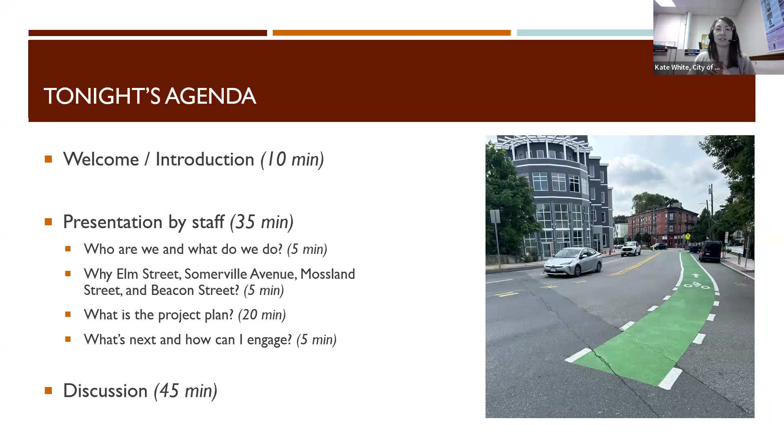This project is being led by the Mobility Division, which is part of the city's Office of Strategic Planning and Community Development, known as OSPCD. My name is Lillian Worth, I'm a transportation planner, and I'm working with Adam Polinski, senior planner, and Kate White, transportation planner for outreach and engagement.

Although mobility is at the helm of this project, we always work closely with other city departments, including parking, engineering, and the fire department when we're proposing changes to a streetscape. For this particular project, because it's on the city line, we're also coordinating with our counterparts at the City of Cambridge.

So I want to briefly share a bit of background on the values that shape our work. For all projects, we start first and foremost with the goal of keeping people safe on our streets. We also aim to increase access to public transit and to create more sustainable options for people to get around the city. We have 2 ordinances that really underscore those commitments.

The Complete Streets Ordinance from 2014 is somewhat broad, and it stipulates that when we're redesigning streets, we should be designing them for all modes of travel and also all ages and abilities. The Safe Streets Ordinance, passed earlier this year, sets more specific targets and timelines for street safety projects, including implementing protected bike lanes from the Bike Network Plan, improving accessible parking spaces, and making pedestrian and transit improvements.

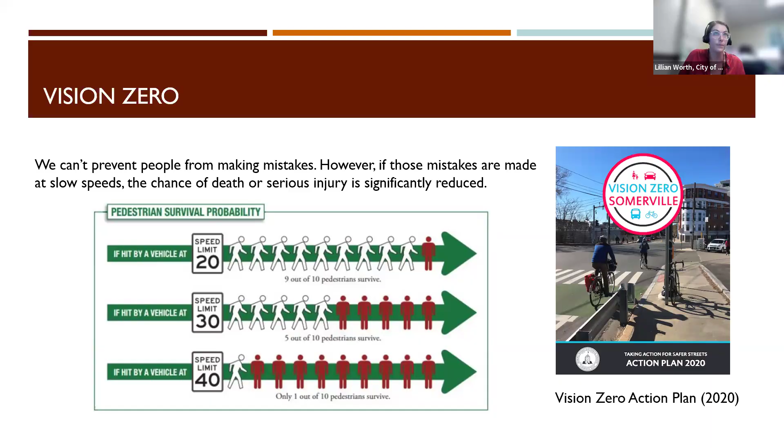Next, I'll go into some of the factors that went into our decision about why we're making safety improvements here specifically. All of the streets in our project area are part of the Bike Network Plan, with Elm-Beacon and Somerville Ave planned to receive protected bike lanes and Mossland Street set to become a low-traffic neighborway. We'll get a little more into the details of what a neighborway means later in the presentation.

The Safe Streets Ordinance passed by the City Council obligates us to create approximately 30 miles of new protected bike lanes by 2030, which is about 4.5 miles per year counting from today. This project, when complete, will provide almost 2 miles of those new protected bike lanes. So it's a very high impact project in a really key area of our network.

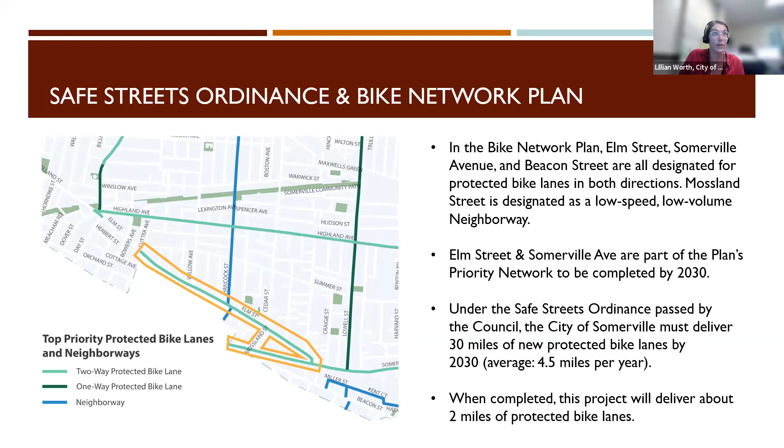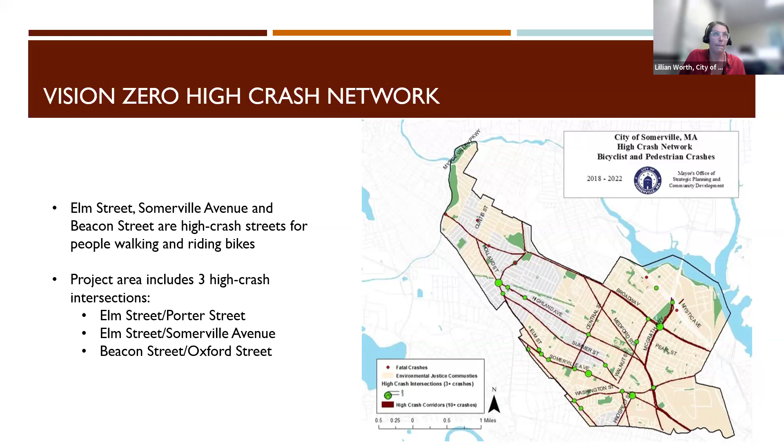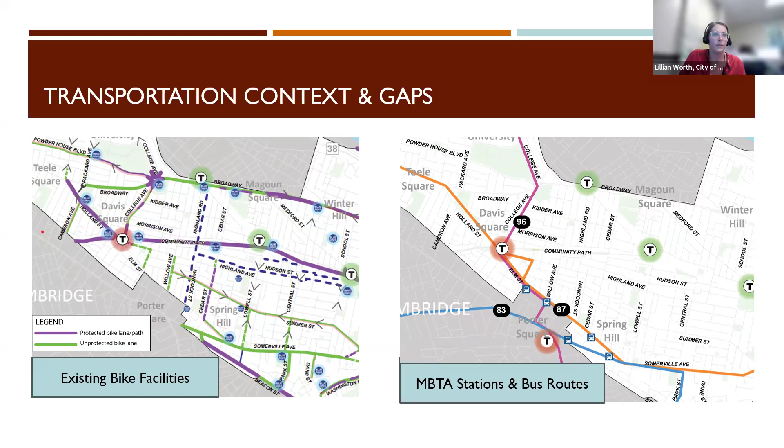We want to also acknowledge that this is the gateway to the Beacon Street protected bike lane, which is a very high use corridor and one of the best quality bike facilities in the city. Currently it dumps you out on the northern end in a very wide, unprotected intersection, so we want to fix that.

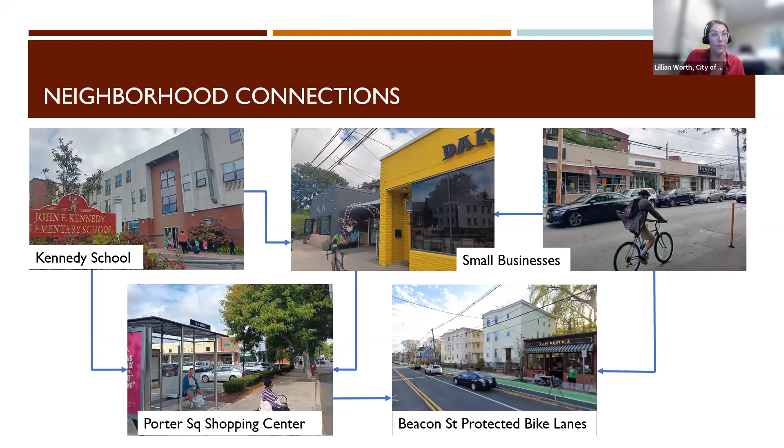We want to acknowledge that all of the different elements in this neighborhood are important, and that as we develop design plans, we're considering everybody in the area who lives here, who works here, who visits, and who travels through here. With that context in mind, I'll turn it over to my colleague Adam, who will describe the project plan.

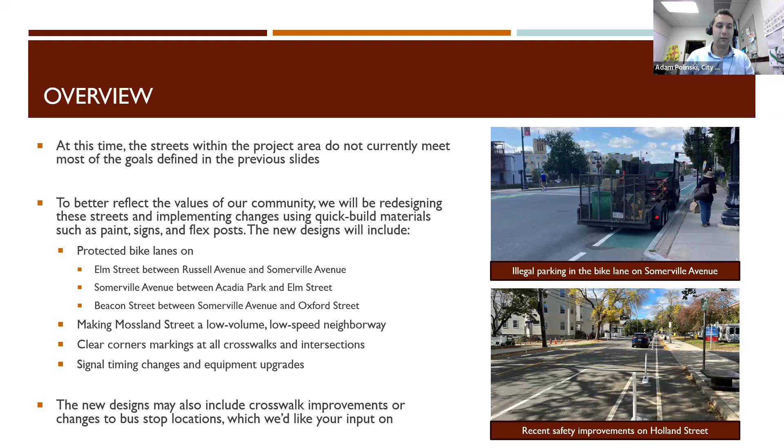We're also looking to make improvements to crosswalks and potentially changing bus stop locations. That's something we really want feedback from you all on, to help shape where we focus those efforts, specifically for some of the pedestrian and bus treatments.

Since this is a quick build project, we wanted to make sure it was clear regarding what is and isn't within the scope of the project, since it's a little bit more limited than other types of projects the city does. As far as what is included, we will definitely be installing protected bike lanes.

We will be changing parking regulations, narrowing travel lanes, modifying traffic signals, and changing the street network. That's specifically in reference to Mossland Street.

As mentioned on the last slide, we're also looking at opportunities to improve crosswalks or make changes to bus stops. We may be able to coordinate with our urban forestry team to plant some additional trees on these streets, and that's another thing we want to hear from folks on, in terms of whether there are big gaps in the current urban canopy.

What won't be included as part of this project is any street repaving or sidewalk reconstruction. There's not really going to be any physical changes to the street, so we won't be able to add any physical traffic calming treatments like speed humps or raised crosswalks.

That will also preclude us from adding any new crosswalks at this time, because you do have to build at a minimum curb ramps to add a new crosswalk. There won't be any utility work of any kind either, whether below or above ground, and we also won't be adding any planters as part of this project.

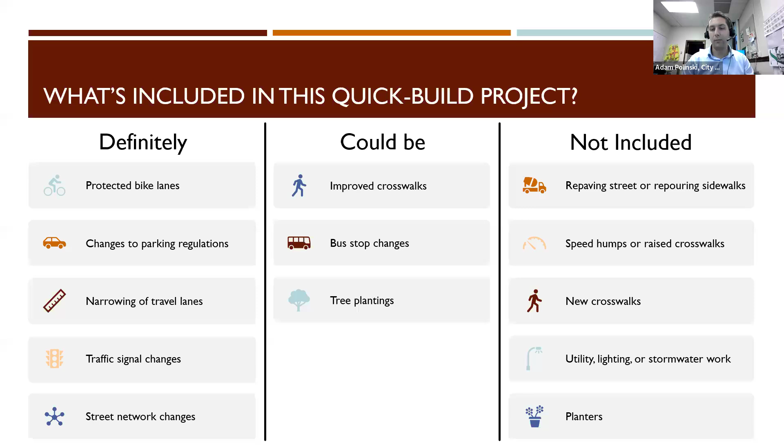That obviously begs the question: if the scope is so limited, why are we doing a quick build project and not full reconstruction? Well, the main answer is that at this time, none of the streets within the project area are in the capital investment plan or the 5-year repaving plan.

So we are still obligated to deliver 30 miles of protected bike lane over the next 5 years, even if not all of those can be full reconstruction projects. For this particular project, that leaves a quick build lines and signs method as the only way to deliver street improvements here for the foreseeable future.

That may sound like there are a lot of things that aren't possible, but there are some benefits to a quick build as well. This type of project allows us to implement things on a much faster timeline. The construction is a lot less impactful because most of it happens overnight, and it allows us to be more flexible, whether that's during implementation or afterwards. If there are things that need to be tweaked, it's a lot easier to do it with paint, signs, and cones than it is with curbs and concrete.

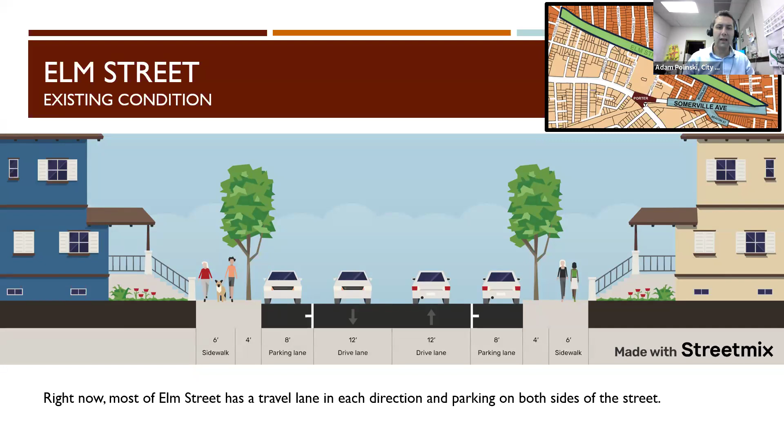So with that, I'd like to start going into some of the design options we're currently considering. Let's start by looking at Elm Street, which is the longest section of street in the project. While the width of Elm does vary quite a bit between Russell and Somerville Ave, as you all may well know, most of it looks roughly like what we're showing here, which has one travel lane in each direction — one southbound, one northbound, or eastbound and westbound, depending on how you want to look at it.

There's also a lane of parking on each side. Our design for Elm Street will include a travel lane in each direction, so we're not planning on one-waying Elm Street. It will also, at a minimum, include protected bike lanes in each direction per the bike network plan. For the majority of the street, with the caveat that the width does change a little bit, that will leave typically about 7 feet of space. At this time, we anticipate using that 7 feet to provide a lane of on-street parking, and we welcome the community's input on which side of the street parking will remain, whether on individual blocks or slightly longer stretches. That's definitely something we want to work with everyone to understand — where it would be most beneficial to keep that parking, on which side of the street.

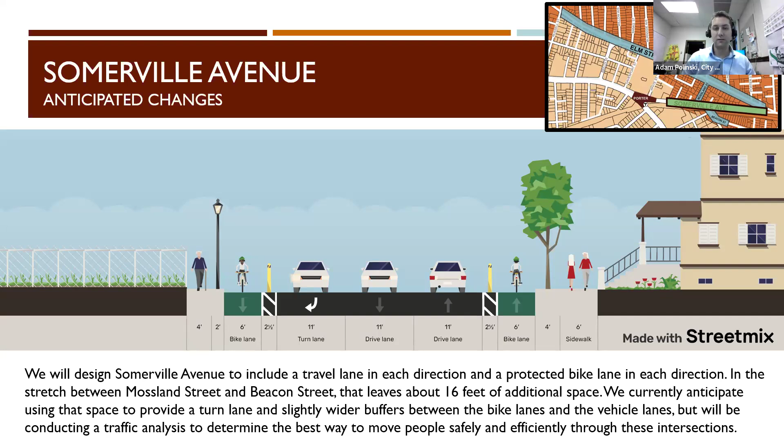Next, we'll move over to Beacon Street. There isn't a big chunk of Beacon, but it is a critical piece. As Lillian had mentioned earlier in the presentation, there is a gap here where the current protected facilities further down don't lead up to the ones on Somerville Ave.

We will be designing Beacon Street to include, at a minimum, a travel lane in each direction and a protected bike lane in each direction.

In this stretch between Roseland and Oxford that leaves about 10 feet of space, and we currently anticipate using that space to provide a lane of parking on the west side of the street and slightly wider buffers between the bike lanes and the vehicle lanes.

However, we are also considering an option that includes a right turn lane instead of a parking lane. Depending on which way we go, we'll be coming back to you all at the concept design phase to talk through some of the trade-offs of that particular option, depending on where we land and why we got there.

Building these new protected bike lanes on a short stretch of Beacon Street will connect the new facilities that we're building on Somerville Ave and Elm Street to those dedicated bike lanes on the rest of Beacon, so it is filling that critical gap.

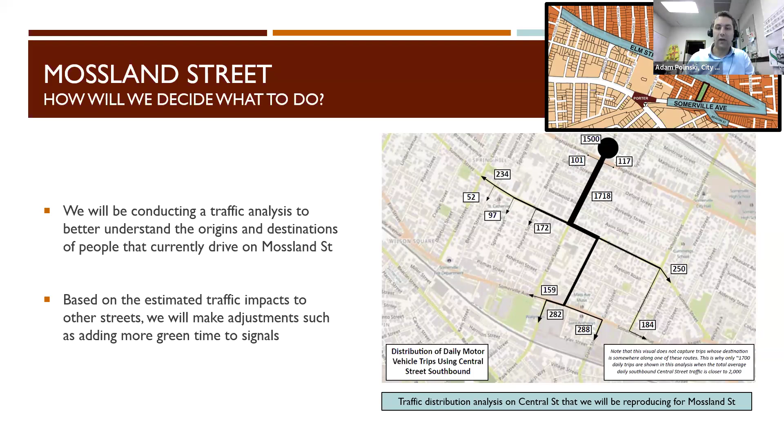However, this project is not all just about bike facilities. The designs that we will be producing can also be expected to have clear corner markings and/or signage, depending on some of the exact locations, at all intersections and crosswalks within the project area, which will increase visibility by making it clear that there is no parking allowed within 20 feet of a crosswalk or intersection.

We've started to add these markings along a number of different streets in Somerville, and they've been rolled out at the citywide scale in Hoboken, New Jersey, which I'd like to highlight because Hoboken has not had a traffic fatality in over 6 years, which is unfortunately not too common for many cities in the US. So a success story for sure.

The designs that we'll be producing can also be expected to recommend modifications to the signals on Somerville Ave, where it meets Mossland Street, Beacon Street, and Elm Street, as well as on Elm, where it meets Cedar and Mossland. This could include simpler changes, such as adding more green time to certain legs of the intersection, but may also include more fundamental changes to the way the intersection currently operates.

We'll also be investing in opportunities to upgrade equipment at these intersections, whether that's adding things like countdown timers to the pedestrian signals, or cameras that can detect vehicles, pedestrians, or bike riders, and then consequently tell the intersection when to give certain legs of the intersection the green light.

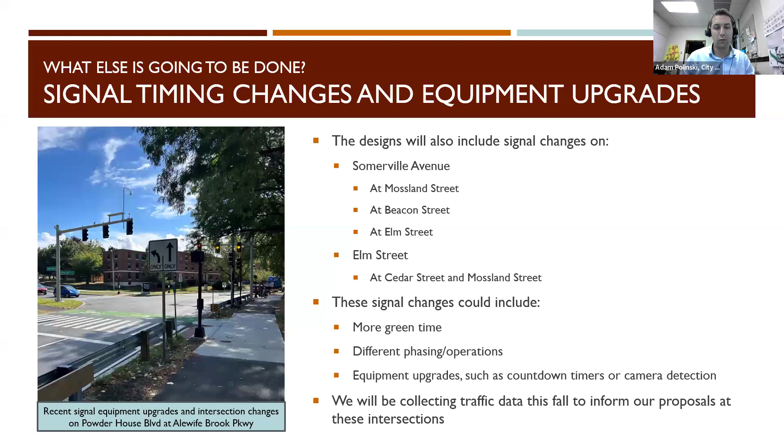We also want to be upfront about the fact that we can't fit everything we want in this design. These streets sometimes feel really wide when you're a pedestrian or a bike rider, maybe even as a driver. But we'd love to be able to fit a lot more in than we currently can.

If our baseline is adding protected bike lanes, it does mean removing parking on one side of Elm Street, as you may have been able to discern from the previous slide. So this is going to be a big change, and we know that's going to have an impact on people.

We're then going to review community feedback that we get from you all. We're going to take regulations into account that we know are priorities, such as accessible parking and short-term loading zones, and then look for opportunities to make changes on side streets as we begin our redesign.

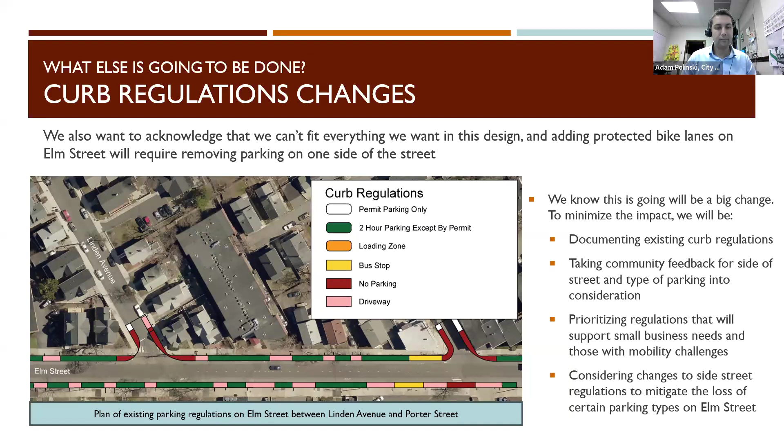And with that, I will turn things over to Kate to discuss next steps and community engagement. Thank you, Adam. And thank you, everyone, for joining us on this presentation. We're really excited to share this information with you.

I'm going to talk a little bit about our anticipated project timeline, and then talk a little bit more about how you can engage. This project is likely to run from September, right now, to full implementation by December 2025.

We are launching first with this community outreach to identify an array of issues on the street. So really this phase, September through October, we just really want to learn from you, learn more about the context, and hear about some of your ideas and priorities.

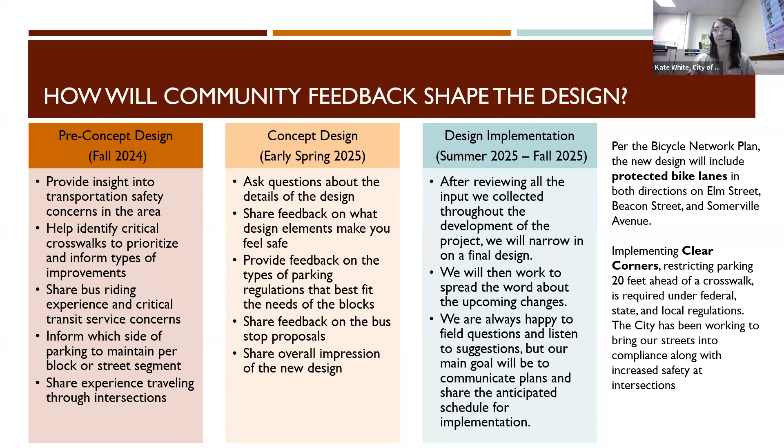Jumping into a few of the opportunities, we aim to provide a variety of ways for community members to be able to engage. This slide lists out some of the opportunities, and I'm just going to go through them at a high level. We will launch each community engagement phase with a larger meeting.

Right now we're doing this as a virtual meeting. We're anticipating our next one in February to be an in-person open house. We also have surveys where you can detail more of your feedback. At this stage, we aim to hear about your transportation safety concerns and priorities. In February, we'll be looking again for feedback on the concept design.

You can also check out our online public input map where you can add comments directly to a map. So if you specifically want to talk about this crossing at Elm Street and Porter, you can note that right on the map, and we'll take a physical copy of this map out to our street outreach events.

We aim to meet people where they are, so for our street outreach events, we're looking at locations that have high pedestrian traffic. We're also looking to do outreach around the Kennedy School so that when parents and children are arriving to school in the morning, they can connect with us and talk with us.

We're also going to be connecting with businesses one-on-one, meeting them on their own time and going business by business to really connect and talk about operational needs, like how employees get to work. We're really trying to understand those transportation needs.

Later on in design development, we also anticipate hosting some other opportunities. We're looking to do some virtual office hours, so if in-person stuff you don't feel as comfortable with, but you really want to talk one-on-one with the team, you can sign up for virtual office hours and connect directly.

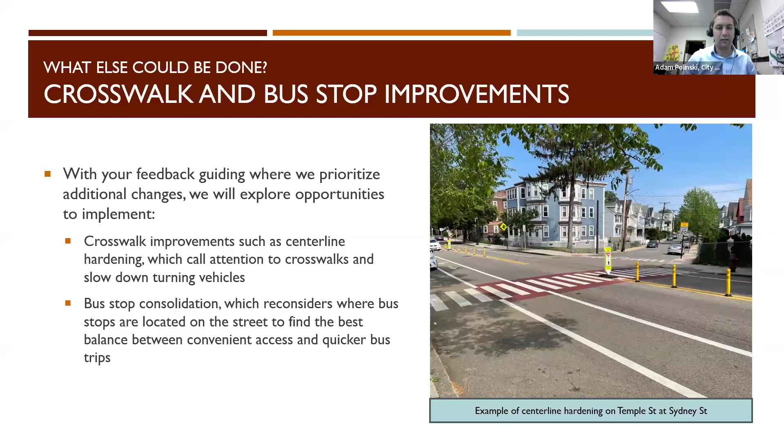Yeah, definitely. I'm going to go back a few slides—I think it'll be better to have the slide up while I'm talking through it.

A neighborway, on a very simple level, you can think of as just a slow, low volume street. I'm sure you can all think of one or two in your neighborhood that you maybe use once in a while, or know is there but have never actually gone down, but it doesn't carry much traffic. There's not really a lot of reason for anyone to use it except people who live on that street. Those really low volume streets that also aren't typically very fast could make good neighborways without us really having to do much.

So it's really trying to create a network around Somerville that isn't part of our protected bike lane network on all of the main streets, like Elm or Somerville Ave, like Broadway for example. Those are all really busy streets where it's never going to be safe for someone not to take the lane—most people won't feel comfortable riding in the same lane as a motor vehicle, so we need protected bike lanes there.

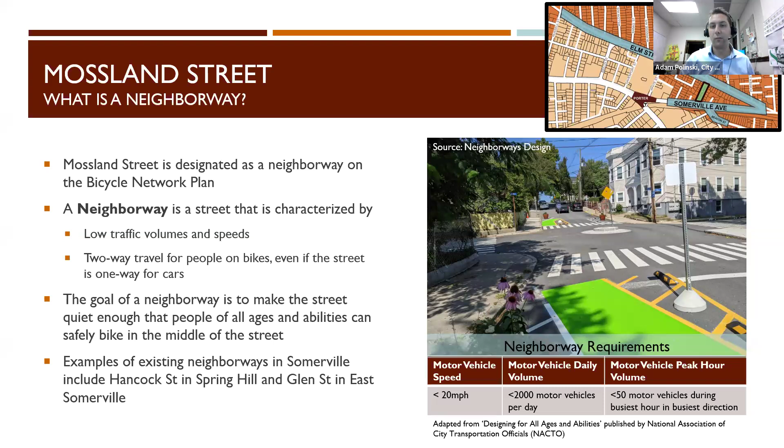As I discussed, there are a few options we're considering. We might be able to just reverse the direction of Mossland Street. However, I think we have to do the traffic analysis we're going to conduct to determine whether that would reduce it far enough, or if there's still a lot of demand for people to drive northbound. We could restrict some of those turns, or make it a dead end. If it's a dead end, only people that live on that street are going to want to drive on it, so that would definitely be an effective way to do that.

And as seen in this diagram, you could still provide 5 feet for bikes to enter and exit the street safely. So I hope that starts to get at some of what we're trying to achieve and how we might achieve it. But it's really just about designating the street for bikes with some signs and minimal markings at intersections, making it a safe, slow, calm street that you don't need a dedicated bike lane for.

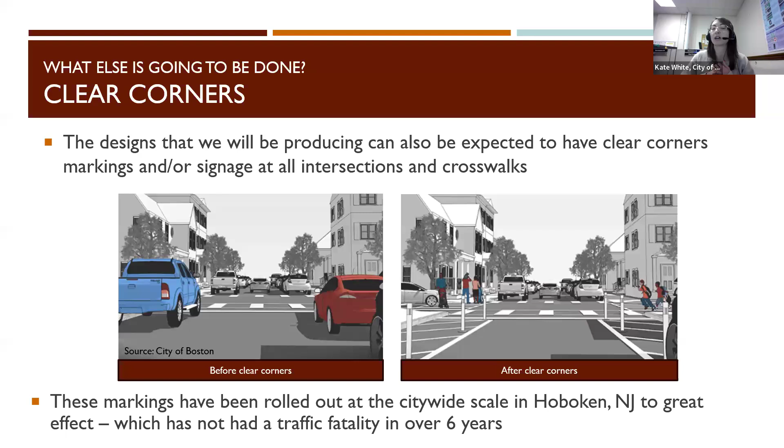Just had another question quickly around the 5-year paving plan - the historical context, why wasn't this dangerous intersection included in the 5-year plan and instead resorted to quick build? The city recently launched a new pavement and sidewalk management program site. We've included the URL in these slides, and we'll also include that in the follow-up email to you after this meeting later this week. It really goes into detail about how our streets are selected. We're really looking at the quality of the pavement and sidewalks, some core accessibility concerns, such as whether there are curb ramps or not. So there's a lot that goes into it, and sometimes other values rise to the top for an intersection.

I think this person didn't highlight it here, but it came up the time we were talking about Somerville Ave and Beacon - that was more recently repaved. So some of that critical infrastructure quality didn't reach the levels that some of our other locations have in the city.

So maybe I'll jump to another question around scope. Adam, we got a question around - can White Street be added to scope so that bikes can go contraflow on that street? Maybe we can just reiterate the scope of this project.

Our focus is definitely on Elm, Somerville Ave, Beacon, and Mossland. Like I mentioned, we are also doing a traffic analysis, so if there are streets that are impacted where we need to consider other types of changes, we're going to keep an open mind on that front. But in terms of what we're trying to deliver, it's safety improvements to those four streets we've been talking about. It would really only be as a mitigation strategy that we'd consider any adjacent streets that may be impacted by the Mossland change.

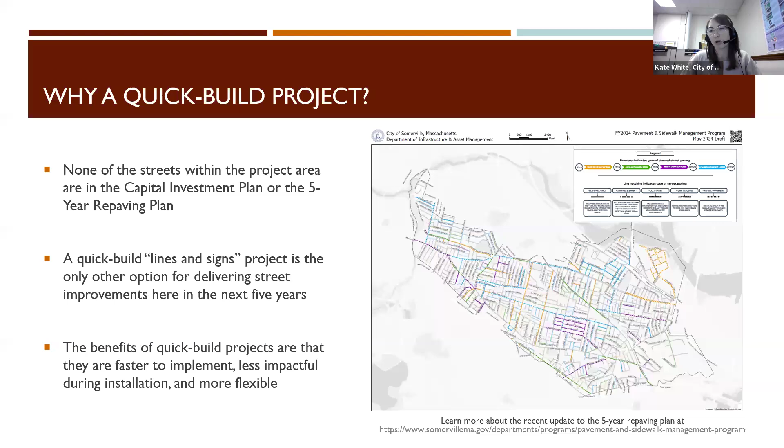We're happy to share some resources from the National Association of City Transportation Officials around how protected facilities really increase safety for people biking, along with things like clear corners. Just recently, I believe in the last year, the U.S. Department of Transportation released a report saying protected bike lanes truly do increase safety and reduce fatalities, which is quite significant for the U.S. DOT, which primarily focuses on highways but has really been dedicating more work to safe streets investment, especially with their Safe Streets and Roads for All program. So we'd be happy to share those resources.

We don't have that off the top of our heads, and I think this question is looking for specific data and evidence. But we can share many resources showing how protected facilities help, and we get into that a bit in the Somerville Bicycle Network Plan, which we can link in the materials sent to you by email afterwards.

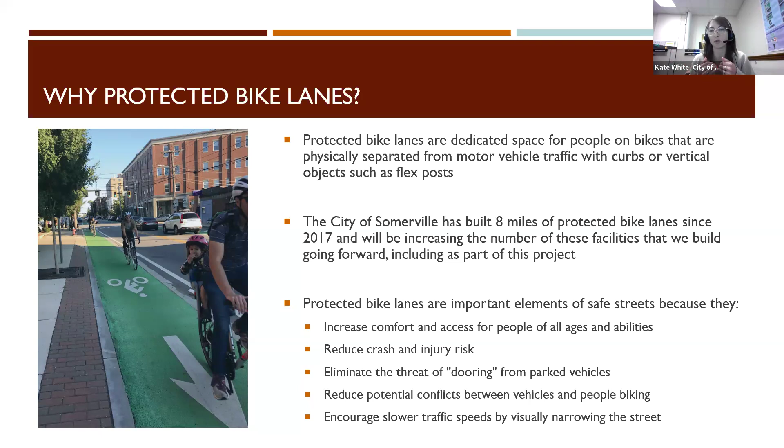Our goal in the bicycle network plan is to have a commitment by 2030 to complete our base network, what we call our priority network, really the backbone of the network, with either physical or constructed protected bike lanes or quick build, but longer term those quick builds will turn into more permanent installations. So when we have the opportunities to construct, we definitely want to come back and look at more permanent opportunities. One thing we know is the opportunity with quick build allows us to learn and adjust later. We are more limited, but then we can say, maybe we would change this over here, maybe configure this intersection a little differently. So this is really the first step in that longer term vision of what these streets could look like.

I'll just take a few more. We actually had some questions around Kennedy School pickup and drop off and the use of the nearby Porter Square lots. Those are great questions. I think we really want to first start with understanding the full picture of school arrival and dismissal. So we're going to be having those conversations with school administration, parents, and all of you, to really understand that, but we're going to be focused on what we call the public right of way, so what we can do within the public street. But again, we want to first learn before we say this is exactly how it should look. We're just going to comb through more.

Okay, here we go. So we've got some other questions really digging into the details of different intersections. Adam, can you talk a little bit about whether, in this part of the project, all intersections will have a no turn on red sign or law implemented? Where that is relevant, which would be at any signalized intersection with a traffic light, I think we would very likely be implementing no turn on red. I'd have to confirm that 100% with our traffic engineer to make sure it fits our criteria, but generally speaking, most signalized intersections in the city do fit the no turn on red criteria. So that would likely be implemented as part of the effort.